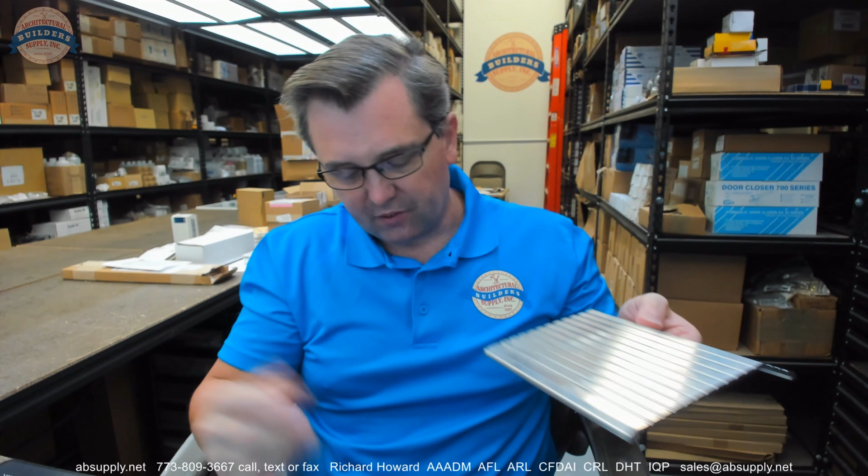A very appropriate sort of threshold when you have some sort of uneven floor surface is simply what it could be. You could have, in a concrete pour in a condo building, you could have some concrete that's not quite level, and you need to transition that off and down.

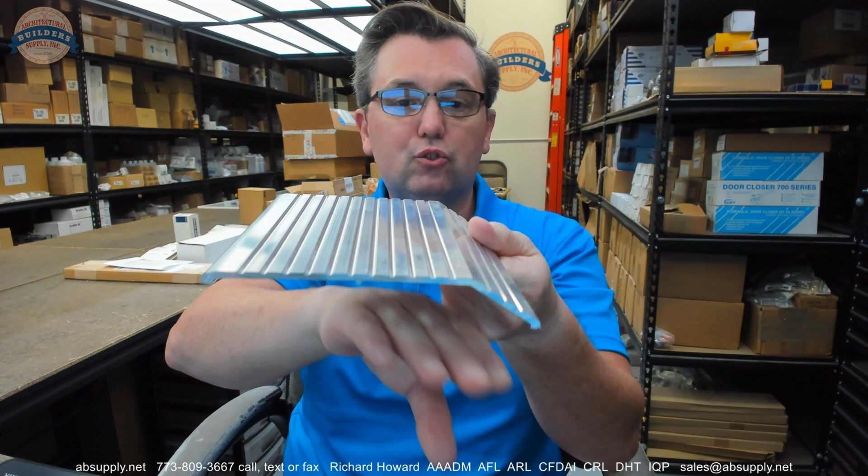More commonly, you might have a structure underneath a door opening. You might have a sill onto which the door unit has been set. You might need to transition with a threshold, but then come back down to whatever might be below that. And that's where this is used. Not very common, but common enough for us to keep a couple on hand.

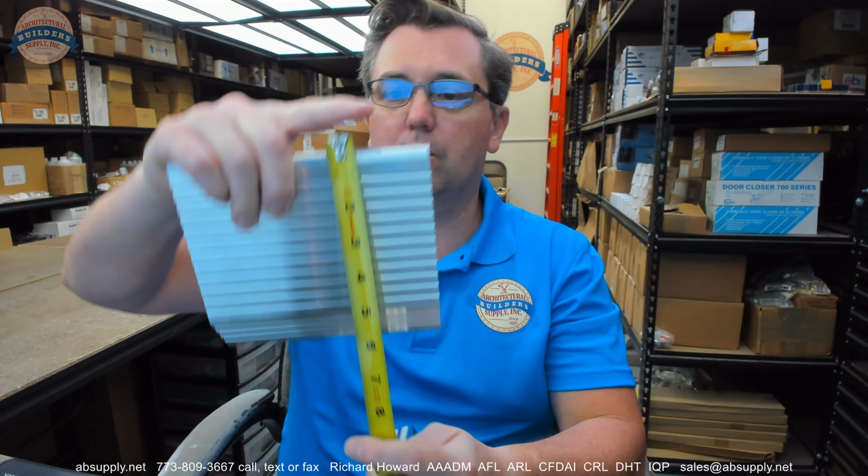So dimensionally, this item - and there's an image down below showing the dimensional properties - it is 6 1/4 overall width. The overall height is 1 inch. Over here, it's 1/4 inch, which means it's going to allow us to contend with a 3/4 inch offset floor condition. So if you have 3/4 inch that you need to transition over, this might be it.

Now, this is not handicap compliant. It features too great of a rise for it to be handicap compliant. In terms of the relationship between rise and run, if this was to be handicap compliant, you would need a 1/2 inch rise for every 6 inches in width. So this would be strictly not handicap compliant. Be mindful of that.

Obviously made of aluminum. The A in the part number means mill aluminum. This is just what the item looks like when it comes from the mill, how it's extruded. Different other finishes this is available in - let's take a look at those now. I have them listed here, so I don't have to go from memory.

In the 1571, first of all, in an aluminum-based material, you can do A for mill aluminum, BSP for black suede powder coat, D for dark bronze, and WSP for white suede powder coat. The black and white suede powder coat is just literally a powder coat paint over the mill aluminum.

You can do it in an AK. AK is a Pemko coarse applied surface to substantially reduce the potential for slip. The threshold's fluted, and the fluting itself does help prevent someone's foot from slipping, but the AK will give it a substantially greater resistance to slip.

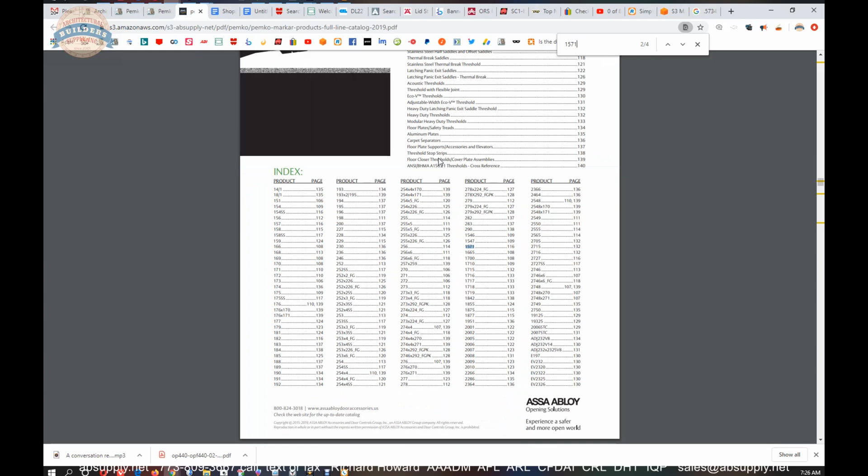As that loads, we'll do a find function for 1571—Control F, 1571—on our keyboard, and cycle through until we find it. So here is our item.

The more common unit would certainly be the 157, which is for a 1/2-inch floor offset. The 2727 I don't sell too often, but the 157 would be the most common, followed by the 1571.

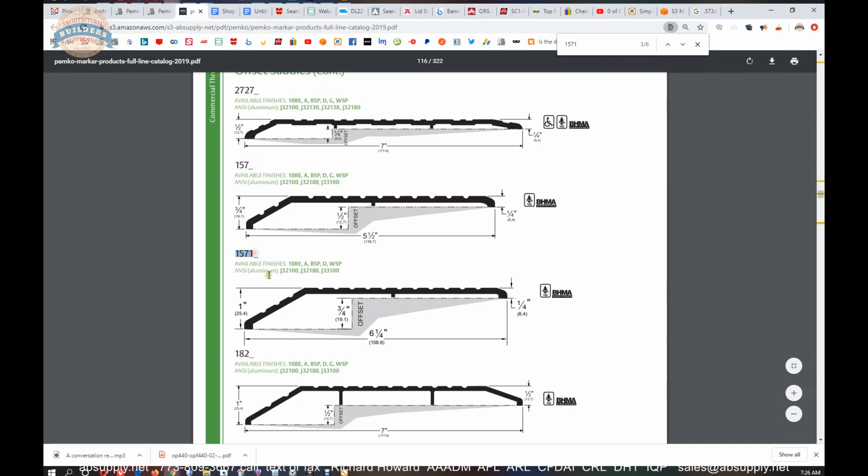Fairly common as well. Once you're in this section of the catalog, as you move up and down through the pages, you'll find lots of other options.

When it comes to lots of other options, the name Pemko is thoroughly synonymous with the greatest product diversity available from a single manufacturer when it comes to weather stripping. Simply stated, no one has more profiles than Pemko does, in my opinion. The catalog just goes on and on.

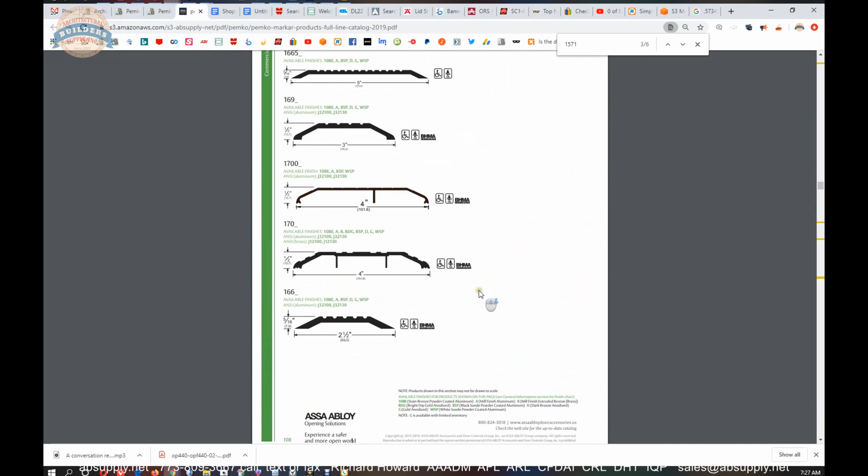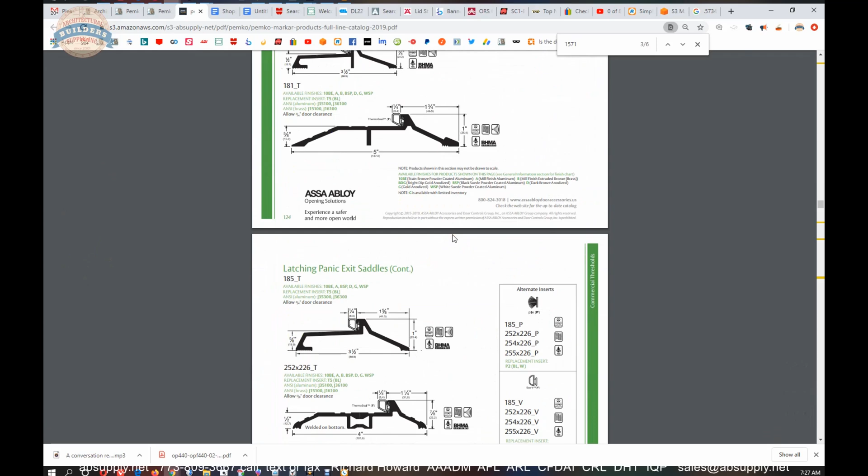So if you are looking to solve a problem, the Pemko catalog is quite helpful because it allows you to see visually many other profiles. You might find something more appropriate, or pieces that can work together to solve the problem. Keep in mind that Pemko can do custom fabrication as well—if you needed to cut and weld, they can do that sort of custom fabrication too.

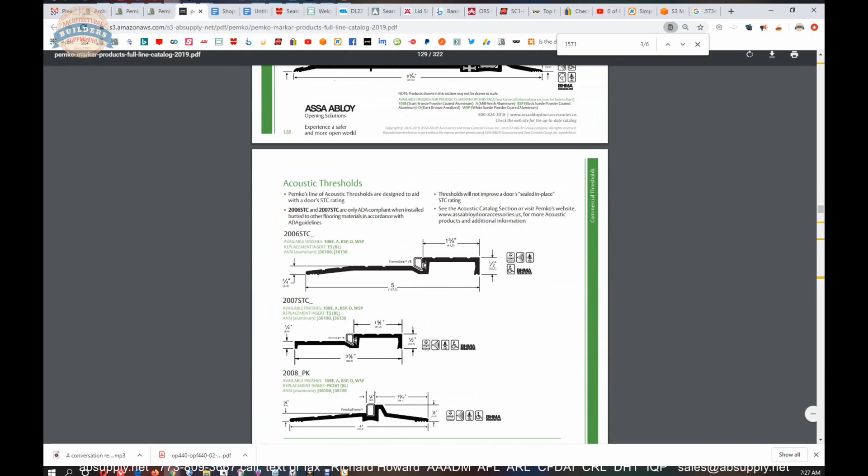Let's wrap up this video on camera.

In conclusion, the 1571A is a relatively typical threshold by a company who, again, has a tremendous quantity of material. Pemko's strong suit is indeed how truly vast their product offering is, coupled with exceptional customer service and technical support.

In terms of technical support, they've got a gentleman there who's very responsive when it comes to all things weather stripping related, and to him I say thank you.

Pemko has a robust offering as well of sliding door material. That line is supported by a lady in technical support who is literally second to none when it comes to thoroughly possessing an expert level command over sliding door track, hangers, in its nth degree of variations, applications, material types, sizes, configurations, etc. No one I've ever met knows more about it than this lady does at Pemko.

I would suggest that if you have a need for sliding door material, I would look at Pemko—not only for the quality of the product and the value, but knowing that there's someone at the factory who can thoroughly support the requirements of technical support.

Beyond amazing. Any questions on the 1571A mill aluminum offset saddle threshold, or any other Pemko product, please feel free to reach out to us. And thank you.